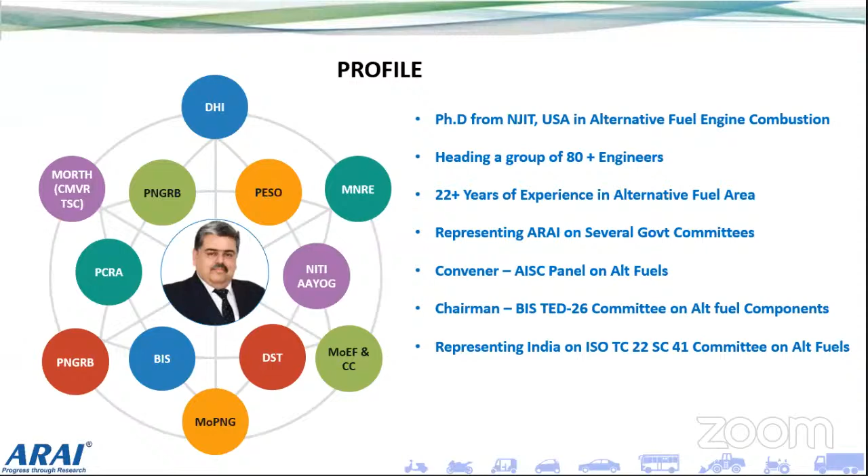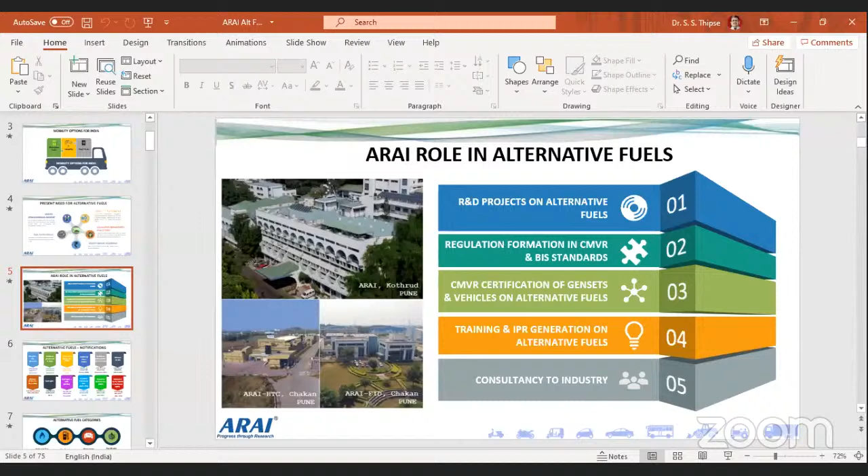Now coming to the ARAI role, as I am a representative of ARAI, we have been working in this area for many years. We do R&D projects, regulation formulation, CMVR certification of gensets and vehicles, and training and consultancy. These are some of the ambits in which we work in alternate fuel. We are based in ARAI Pune, Kothrud, and we also have 2 campuses in Chakan, about 40 kilometers from the main campus.

Now coming to what are the alternate fuels which have been notified in India. There are many fuels notified by the government of India. Normally when a fuel is notified, they issue a number and a gazetted statutory regulation, GSR as we call it, and that establishes the fuel and adds it into the Central Motor Vehicle Rules. So all certification is done as per CMVR, and all fuels are notified in the CMVR. These are the different numbers and names of the fuels which have been notified in CMVR. I will go through them one by one.

Bio-CNG, that is biogas, has been notified as a fuel. Biodiesel, that is B20, 20% blend, and 100% blend. Compressed natural gas, then dimethyl ether, that is a synthetic fuel. Then diesel plus gas - diesel CNG, diesel bio-CNG, diesel LNG. Ethanol - E20, E85, E100, everything is notified. Hydrogen, hydrogen CNG, LPG, LNG that is liquefied natural gas, and methanol - methanol and its derivatives, M15, M100. So these are all the alternative fuels which have been notified by the government for use as automotive fuel.

That doesn't mean all these fuels are present in India, but they are allowed by law. So tomorrow, if any manufacturer wants to introduce these fuels, it is possible for him to introduce them in India.

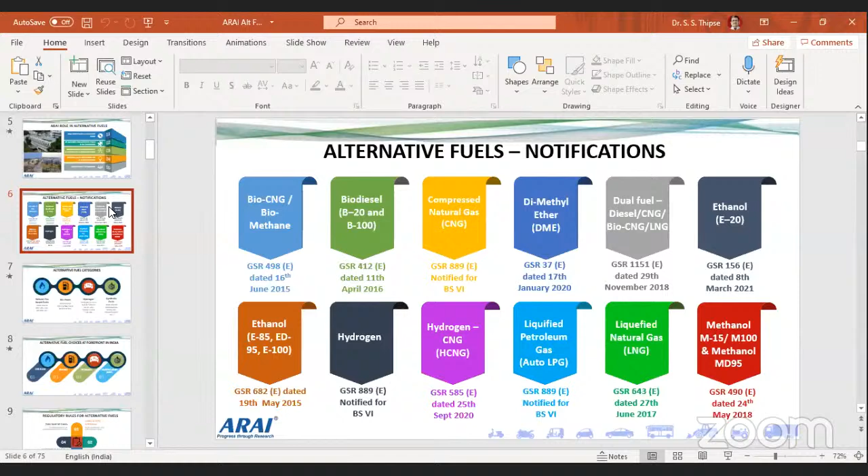Then what are the different categories of alternate fuels? Now I gave you the whole bunch of alternate fuels, but you can classify them into 4 different buckets. The first is naturally occurring gaseous fuels - these are available in nature itself, you don't do any processing for that. Like natural gas - CNG and LNG - all these are naturally occurring fuels, also termed as gaseous fuels. The second is known as biofuel.

Biofuel - the word bio means it is coming out of a living creature, a living organism. So this category of fuels are derived out of living organisms - either a plant or animal is the base of that particular fuel. For example, ethanol, you derive it from sugarcane, so the sugarcane plant is the basis of that. Then bio-CNG is there, methanol is there, ethanol is there. All the alcohols are derived from grains, and grains are again a byproduct of plant. So all these are living organisms, and the fuel is extracted out of it - that's the definition of a biofuel.

All alcohols are biofuels. Then coming to the third category, hydrogen. Hydrogen per se exists in nature, but it is not available per se as hydrogen - it is always available as a compound along with either oxygen as water, ammonia, or hydrocarbon. So there is some carbon, nitrogen, or oxygen attached to it. Hydrogen is a fuel which is always associated with a particular molecule. Hydrogen is one fuel which is important because it is the cleanest fuel, it's a zero carbon fuel. So hydrogen is the third class of fuel.

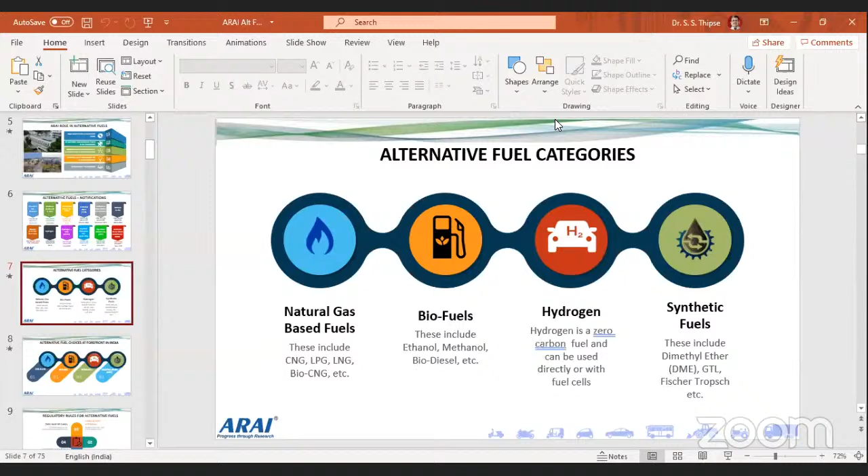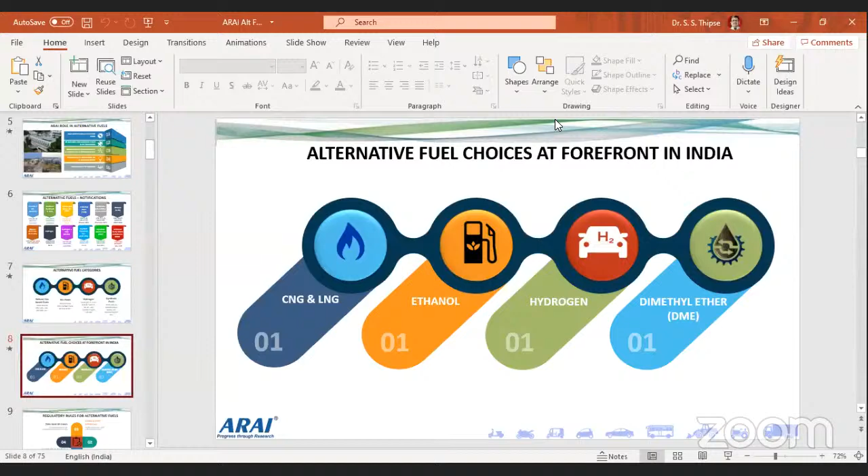And for all four categories, there is a front runner. For the natural gas category, CNG and LNG is the front runner. For biofuels, ethanol is the front runner. For hydrogen, pure hydrogen is the front runner. And for synthetic fuels, DME is the front runner because that is the fuel which is notified in India. Now coming to rules and regulations - there are four types of rules which are important.

One is the vehicle approval rule - that is, how do you approve a vehicle for use in India. So there the CMVR rules 1989 are applicable, and ARAI does the vehicle approval.

Then you have fuel sale by OMCs. This is governed by the petroleum rules, when all your petrol, diesel, gas, everything is sold as per the Ministry of Petroleum rules. Then comes the station, the dispenser, meaning the entire gas station, the tanks, the storage - that is governed by PESO, the Explosives Department.

And then comes the cylinder and the valve, which is fitted on the vehicle. That is governed as per the gas cylinder rules - a different authority. So these are the four different authorities which govern the regulatory scenario for alternate fuels.

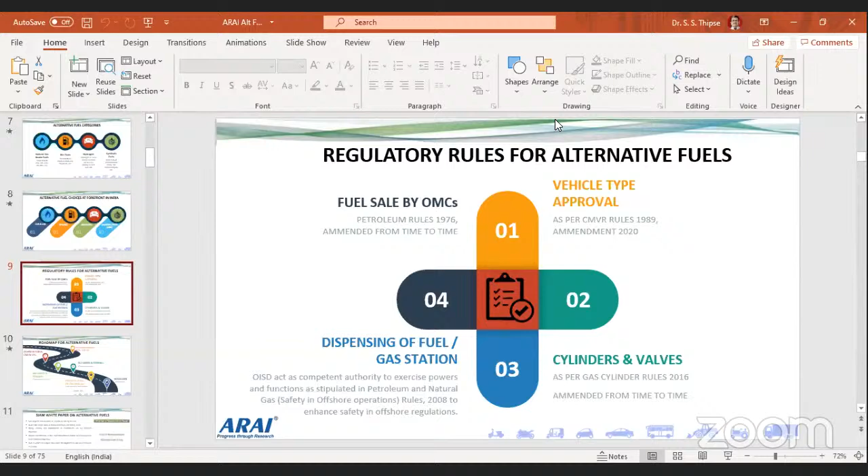Now, how is the roadmap for alternative fuels going on? In this case, first of all, we started with petrol and diesel - the conventional fuels, that is high-speed diesel and motor spirit, that is gasoline.

Then we shifted to gaseous fuels, including CNG and LPG. After that, we slowly started introducing biofuels - biodiesel and ethanol came into the picture. Now we are in the second generation biofuel, derived from cellulose and other feedstocks. So this is the stage where we are.

In the future, we will move to synthetic fuels. The first synthetic fuel has already entered the country, and slowly more will come. Lastly, hydrogen will be the ultimate goal for any fuel because it has no carbon. So the entire roadmap leads to hydrogen in the end.

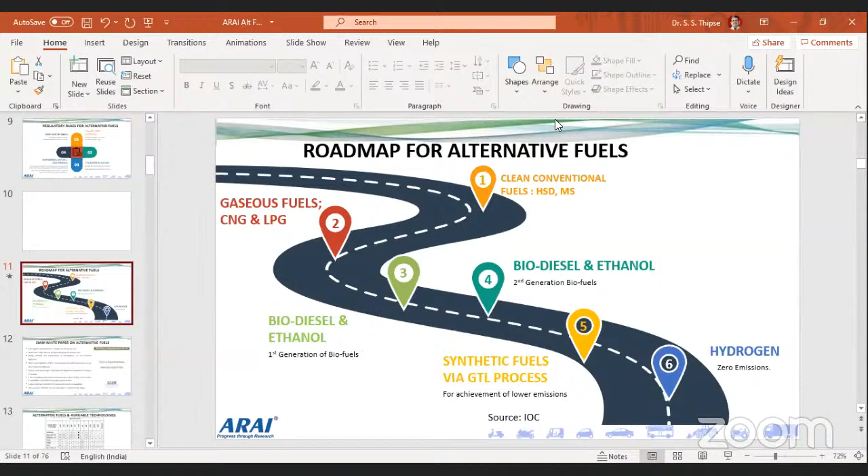This is available on the internet. If anybody is interested, they can see this roadmap, which is widely available. It is a very good document which gives a guideline on what fuel to use for which segment.

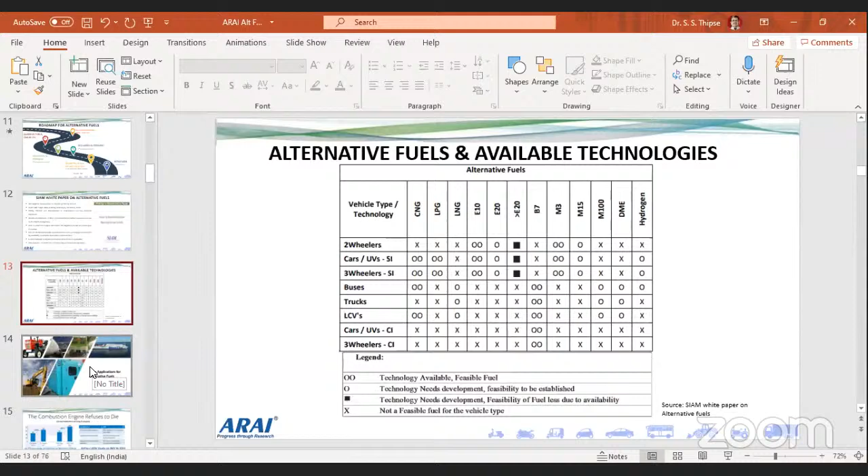Then another big debate going on in the world - if electric vehicles are coming, will the IC engine survive? So whether there is a requirement of engine and fuels. I am quoting a study here from Arthur Little, available on the internet. What Arthur Little has done is compared electric vehicle with the IC engine vehicle, making three areas of comparison.

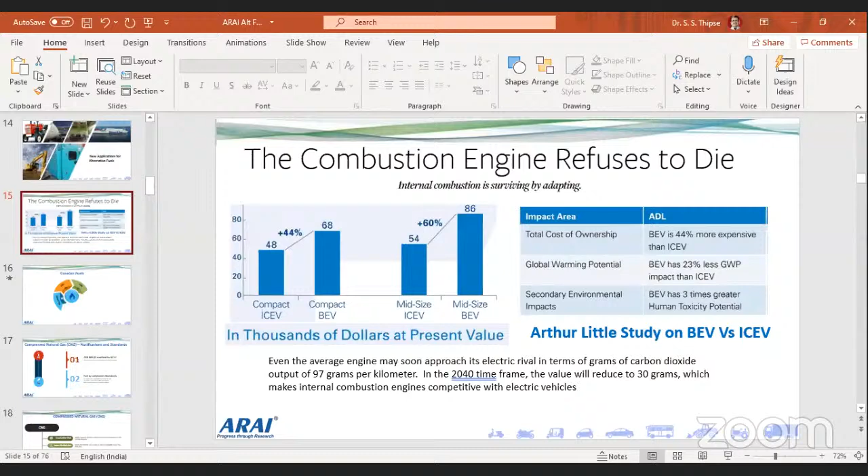We should realize that as electric vehicles are growing, IC engines are also adapting. It is not the end of the road. Our thermal efficiency is hardly 44% for IC engines, so there is still a lot of growth potential and ample research required. IC engines are not going to die; they are going to survive by adapting. So don't despair that because all-electric is coming, engine and fuel have no future - nothing like that is going to happen. That is the message we are giving.

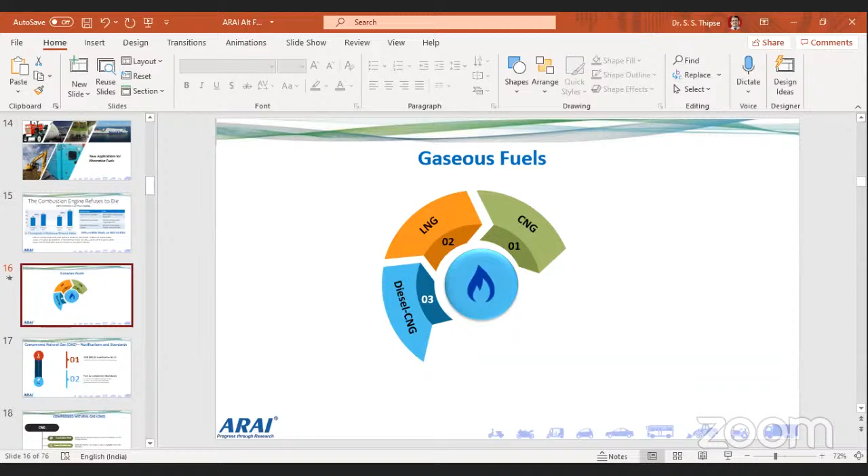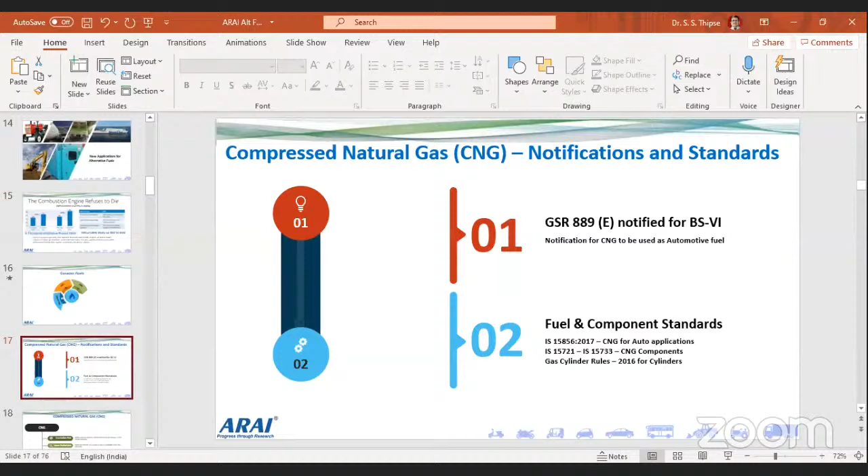Coming to the different segments, I will first focus on gaseous fuels, starting with compressed natural gas. This was notified in India way back in 1991, and even for BS6 it is notified. These are the standards for the different components, the Indian standards which are readily available.

What is the advantage of CNG? Basically it's a low carbon fuel, widely available, lower particulate, renewable, and extremely cost effective. CNG is hardly 40 to 50 rupees per kg, whereas petrol and diesel are now 100 rupees - almost half the price. It's definitely something which is growing in India.

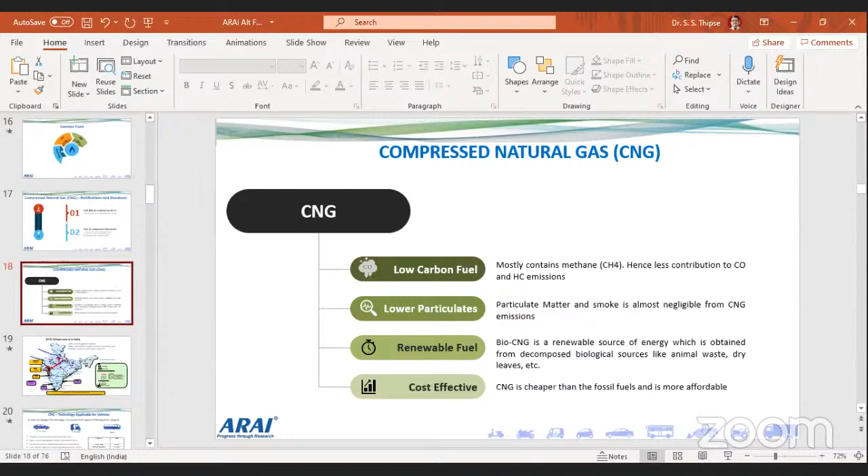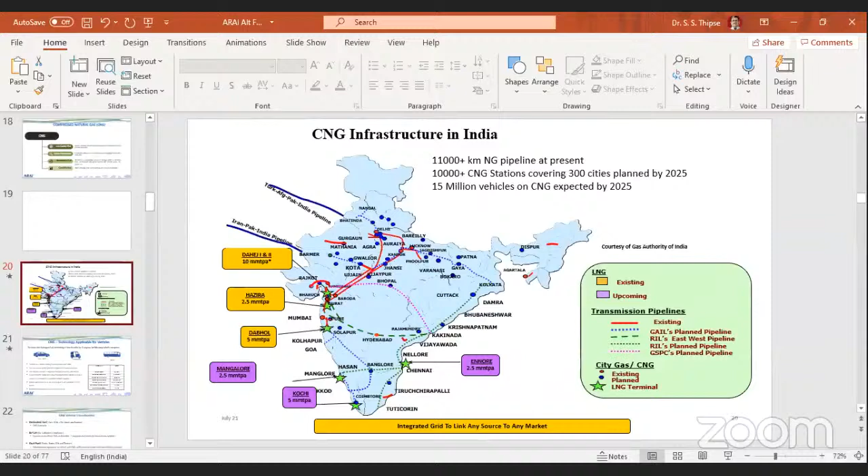There is a lot of pipeline infrastructure being laid in India - almost 11,000 kilometers of natural gas pipeline right now, and around 10,000 plus CNG stations are planned. 15 million vehicles are expected by 2025, so it's a big growth story for CNG in India. Many pipelines are already in place, and many more are planned, so even the east and southern parts of the country will be covered with gas pipelines.

Now if you see the applicability of CNG for vehicles, right now CNG is most useful for cars, three-wheelers, and buses. This is being used for these three categories, and on the right side you are seeing the properties of CNG.

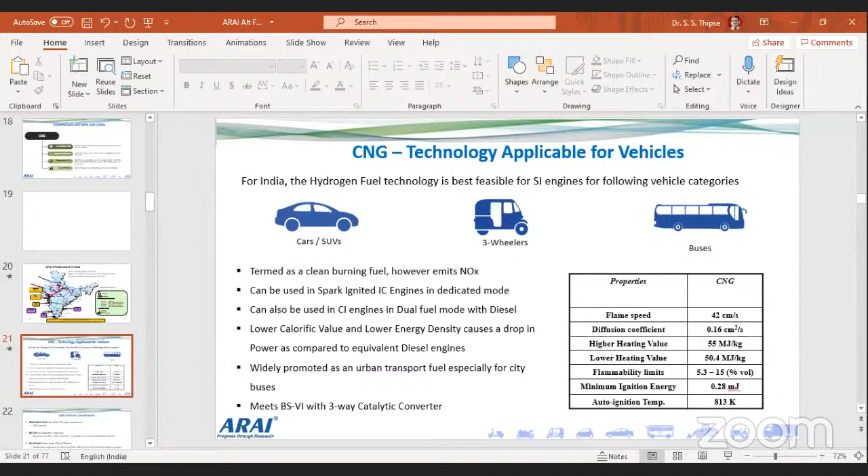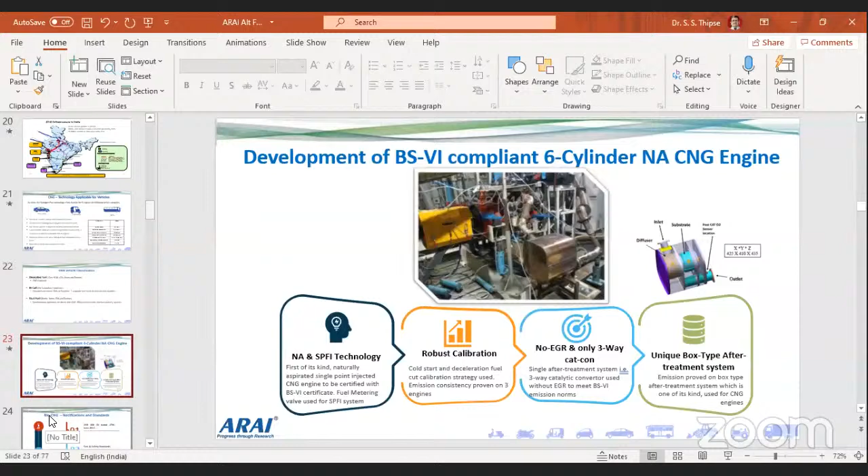Now coming to the next fuel, bio-CNG. This is the rural aspect of CNG, where you take waste and refine it to form bio-CNG. So bio-CNG is one fuel which is a derivative of biogas - all of us are aware that when waste decomposes, it forms biogas.

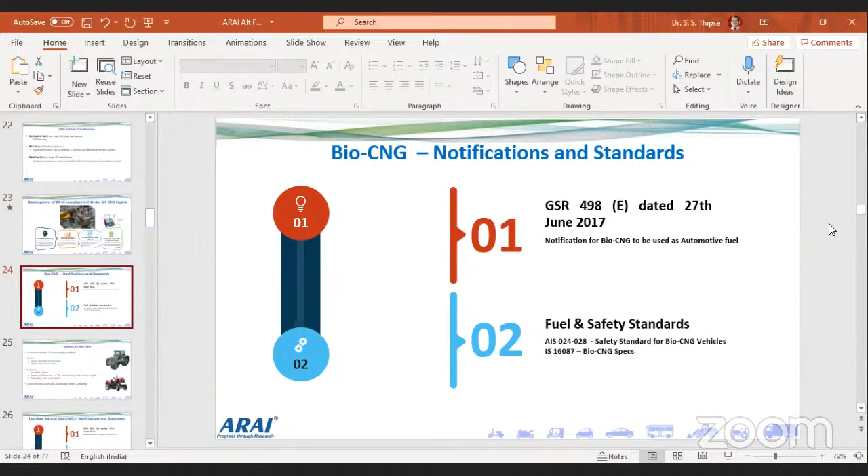And if you purify the biogas, it becomes bio-CNG. So these are the standards for that, and a lot of applications on bio-CNG are being developed, including tractors.

The only issue with bio-CNG is that you need to clean the biogas. You cannot directly use biogas as it is. You have to remove the carbon dioxide, the hydrogen sulfide, and the moisture. Once you do that, the biogas becomes bio-CNG, also called CBG, compressed biogas. That compressed biogas is equivalent to CNG because it is similar in characteristics, and with that you can have different applications.

Typically, this is a rural fuel because the majority of agricultural waste is used for bio-CNG. Typically, people burn that waste, and that causes air pollution, as is the case in Delhi every time. Smog is created because farmers from Punjab burn the waste. So instead of burning that waste, if we can convert it to biofuels, that will be a very good source of energy.

That is bio-CNG, and it can be used for rural applications like tractors, generator sets, rural electrification, and pump sets. All these things can run on bio-CNG. Fuel can be produced there itself and used there itself. So it's a rural fuel, one of the very good fuels, and permitted by the Government of India.

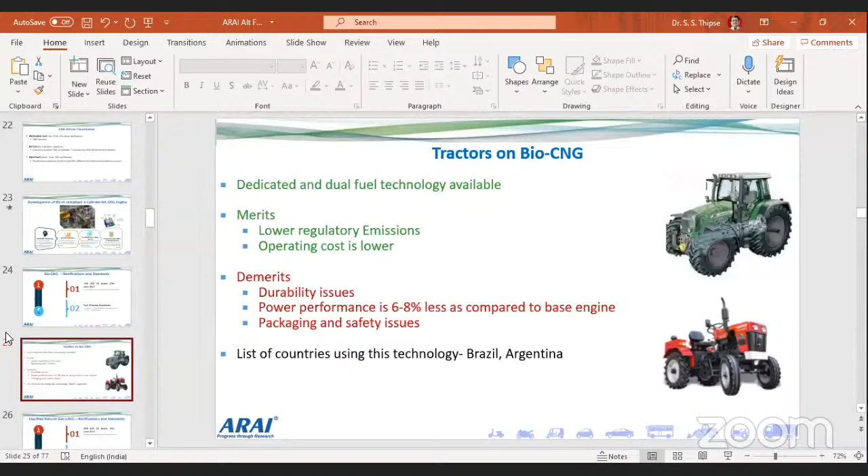Next is LNG. This is another form of natural gas, wherein CNG is compressed natural gas in the sense it is a gasified form. But if you use very low temperatures, like cryogenic temperatures, you can go to LNG, which is liquefied natural gas. The gas becomes a liquid at -162 degrees.

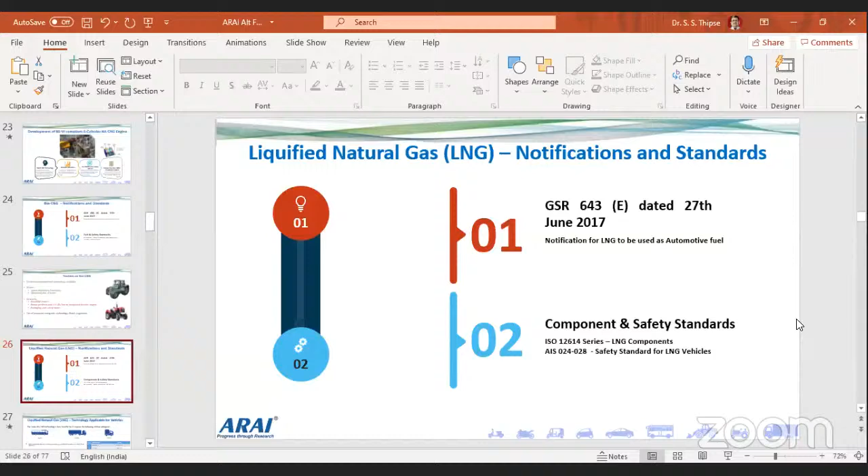This liquid gas - what is the advantage of making it a liquid? You can store it in the vehicle for a greater range, so you can increase the range of the vehicle by having this storage. You can use this for buses, trucks, LCVs, all these different applications can use LNG. It is a very compact storage, just like petrol and diesel, a very compact tank, but it is a cryogenic tank, so it is slightly expensive.

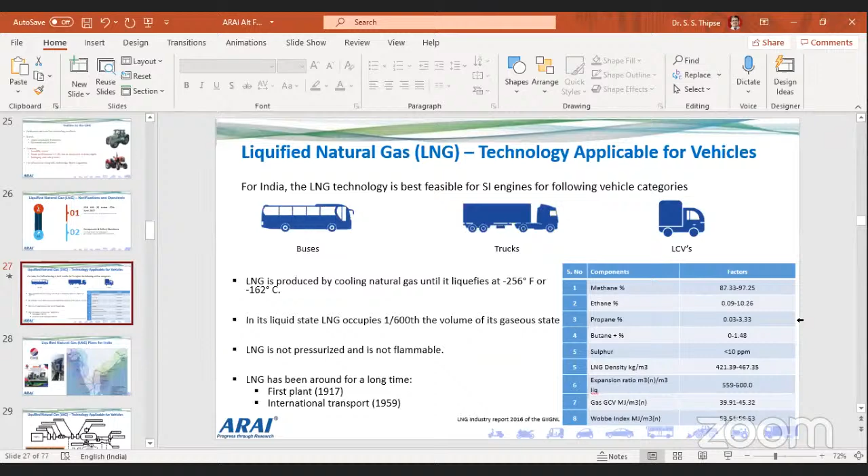LNG is being looked upon as one of the fuels for highways, because in the cities you have CNG, in the rural parts you have bio-CNG, but along the highways where you have long distance trucks and buses running, LNG is the best fuel for that application.

And with this, all the different cities adjoining these ports will get LNG fuel. We can also gasify LNG, and once you gasify LNG, you can then make CNG out of it. So that is very much possible.

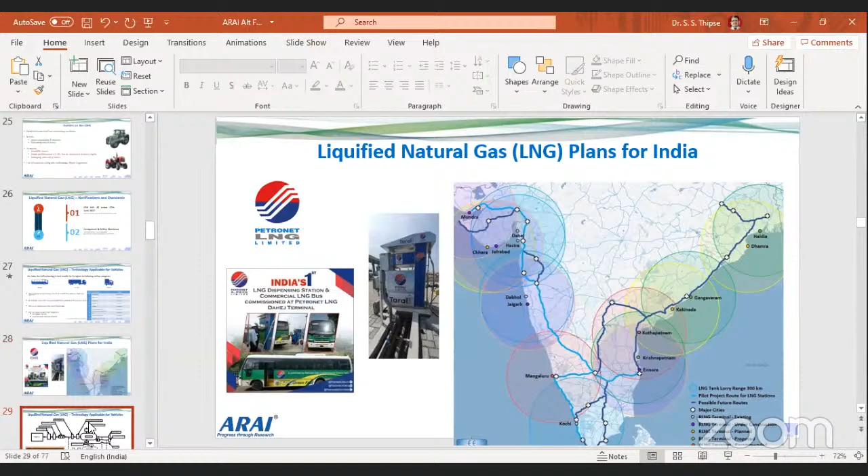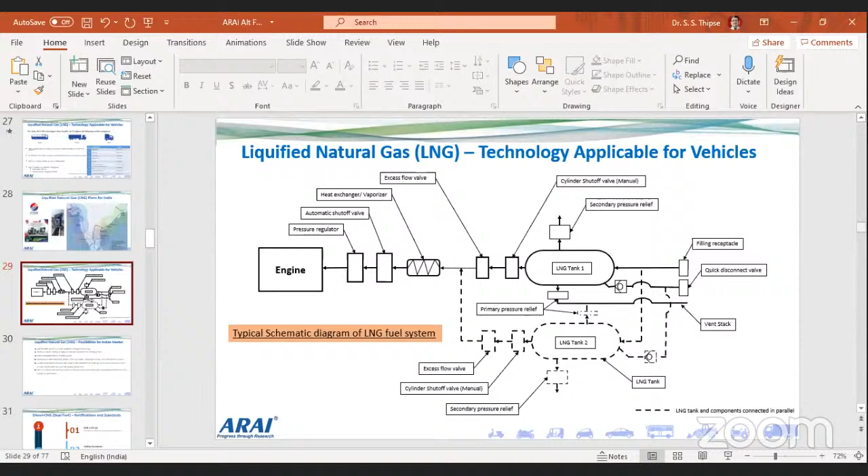This is how a typical LNG system is on the vehicle. The LNG tank has to be fitted on the vehicle. There are many safety gadgets, including a pressure regulator and excess flow valve, and you have to put that system onto the vehicle, adapt it, and take care of the safety and other aspects.

There are many possibilities because LNG, as I said, is promoted as a highway fuel. Trucks and buses are the ideal candidates, and definitely many more stations are coming up. There is also talk of an LNG corridor, where certain sections of the highways will have LNG stations. A lot of activity is happening in this respect. One vehicle is already certified on LNG in Kochi, Kerala, and is already running, so many such vehicles are expected.

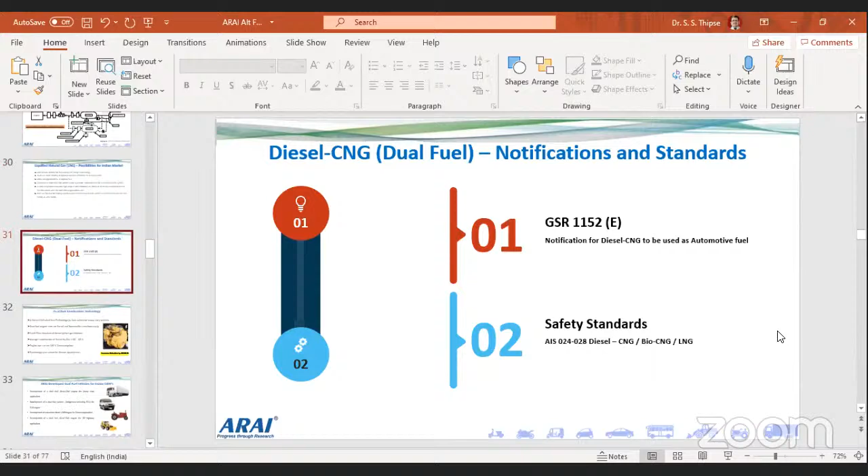Then there is diesel gas, or diesel CNG dual fuel, another technology I talked about earlier. This is another technology of interest. What is this dual fuel technology? Typically in a gas application, you need a spark ignition engine.

But suppose you have a compression ignition engine and want to use natural gas in it. If I directly use natural gas in a compression ignition engine, it will knock - there will be a knocking phenomenon. How do I solve this problem? Suppose I use diesel plus gas together. In the ordinary diesel engine, air comes inside, gets compressed, diesel is injected, and the whole mixture is ignited.

In this case, you have diesel plus gas together coming inside, and it gets ignited. Air comes in, natural gas comes along with the air, but the heat of compression does not ignite the natural gas and air. When the diesel is injected, it ignites the natural gas and air. So the total mixture is ignited by diesel, and you can run this on diesel plus gas together.

The advantage is you don't have to make changes in the engine, no need for conversion of CI to SI. You can substitute diesel by gas up to roughly 85%, but you cannot run on 100% CNG. You can run on 100% diesel, but not 100% CNG. So there should be partial replacement, and the engine remains a diesel engine.

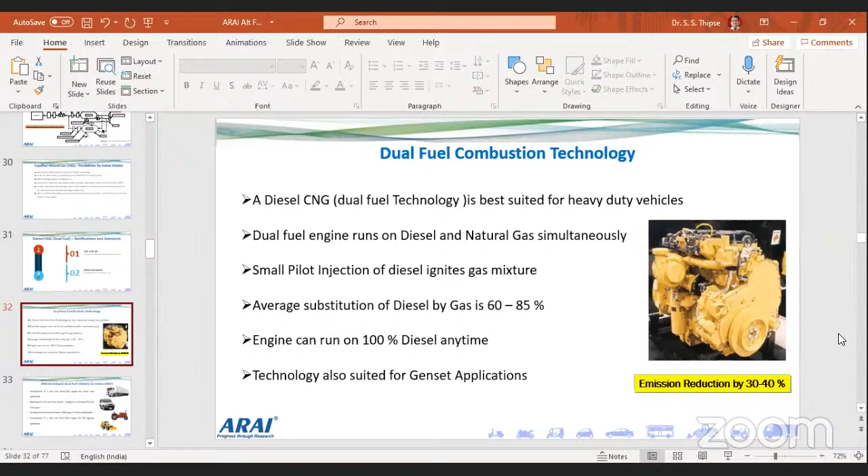What is the advantage of adding CNG in diesel? Pollution comes down, emissions come down. You also get an operational cost benefit because, as mentioned, gas is cheaper than diesel. So you get less pollution and operational cost benefit, while not changing the engine operating characteristics. These are the advantages of dual fuel technology.

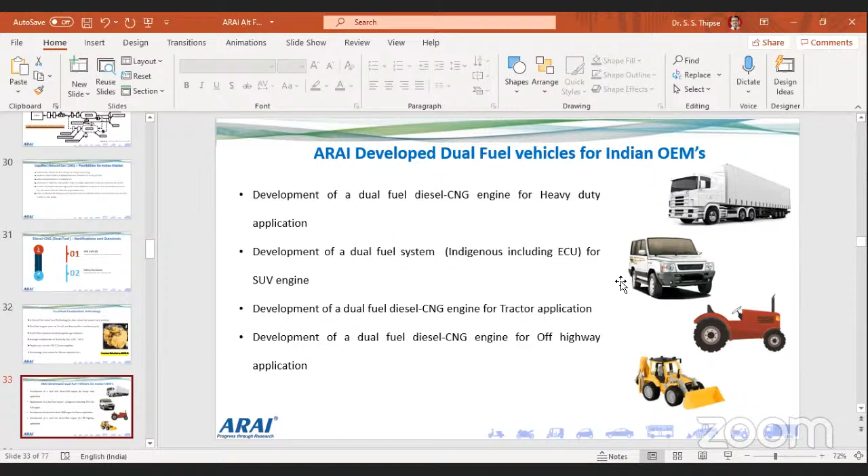ARAI developed a lot of applications for dual fuel: heavy duty, SUVs, tractors, off-highway — all these projects we have done in the past for dual fuel. Also, in terms of rules and regulations, ARAI played a major role.

Now, this is one very unique application: a construction equipment vehicle on dual fuel. Construction equipment vehicles are typically all diesel-based — forklifts, excavators, earth movers, and all kinds of dumpers. All this earth moving equipment are ideal candidates for dual fuel because you can use some gas in them, which helps reduce diesel consumption and save money. Countries like Thailand, New Zealand, and Australia are already using this technology, but in India too it is permitted, and the first vehicle of its kind has already been launched by JCB.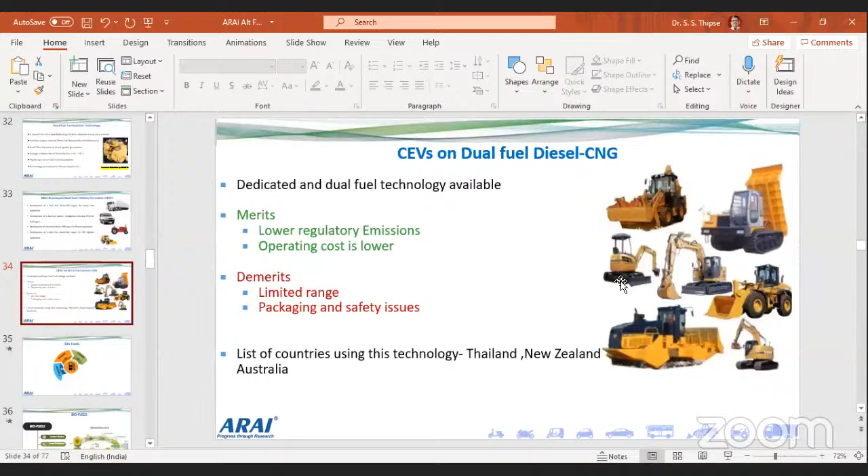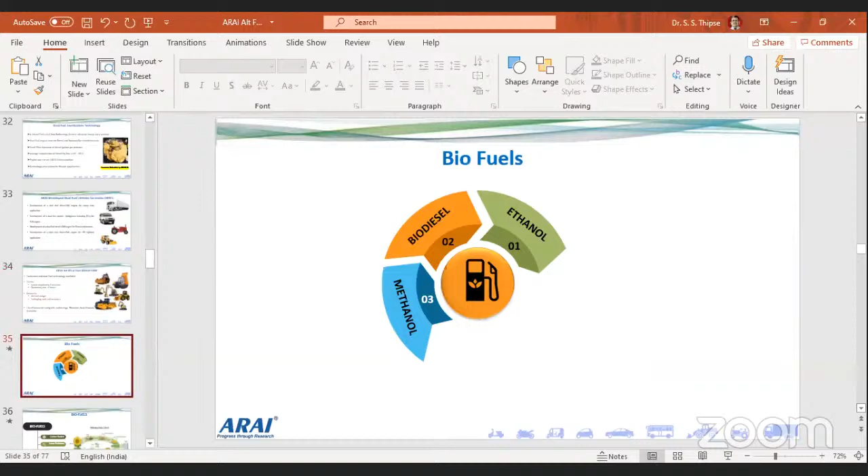Then coming to biofuels — the next area of interest. Here we will talk more about biodiesel, ethanol, methanol, and different biofuels. The main thing here is the biofuel cycle.

Biofuels are called carbon neutral. Why? Biofuels are very important when we talk about reducing CO2 and meeting the Paris Climate Agreement. Any plant, when growing — any oil crop or similar — absorbs carbon dioxide from the atmosphere for growth through photosynthesis, and then produces seeds. Those seeds are taken and the oil is extracted, and from the oil, the fuel is extracted.

This fuel has to be used inside the vehicle. If the fuel is burned in the vehicle, it will again produce CO2. But remember, when the plant was growing, it had already absorbed CO2 from the atmosphere. So it is simply giving back the CO2 to the environment — it is not adding to the CO2 tally. That's why it's called carbon neutral: it absorbs CO2, it produces CO2. Whereas fossil fuels directly add CO2 into the atmosphere, so they are not carbon neutral, but biofuels are.

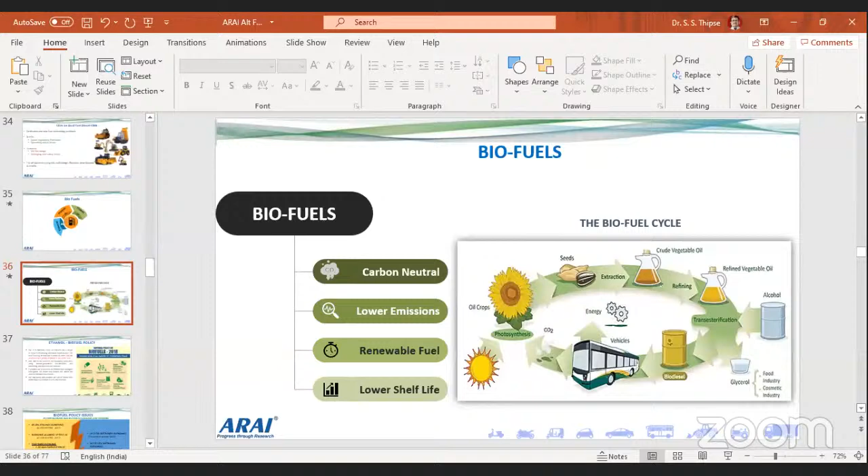Hence their role is very important in promoting low carbon fuels — these are very important aspects. They are also renewable, though they have some shelf life issues. So biofuels are being looked upon in India in a major way.

Then we have the biofuel policy, released in 2018, which discussed ethanol blending with gasoline. Initially the target was 5%, then 10%, now they are talking about 20%, and they even preponed the target from 2030 to 2025 — this is a very recent addition. Ethanol blending is now promoted in India, and they are generating ethanol not only from sugarcane but also from damaged food grains and from corn. All these are allowed, and with this there will be additional generation of ethanol in India.

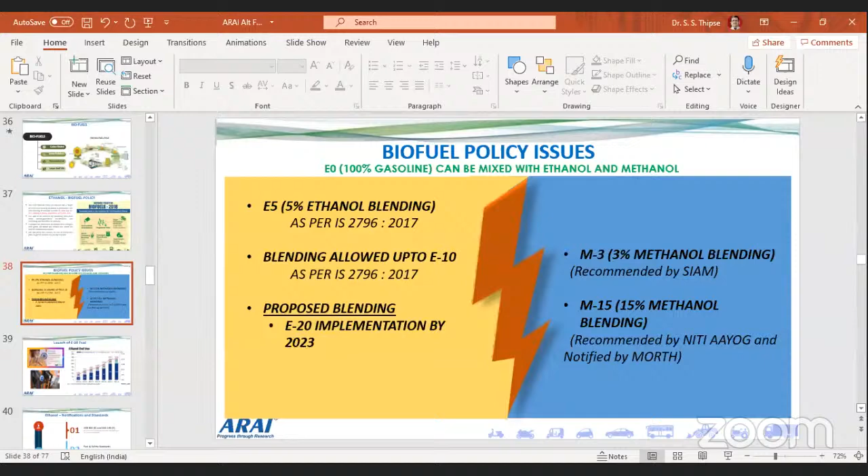There is also a parallel talk about methanol. People are talking about M15 methanol blending as recommended by Niti Aayog, while SIAM is recommending M3. At present, E20 is being recommended as the ethanol fuel standard. Recently, the PM launched the Ethanol 20 program on World Environment Day, and that lays out the roadmap going forward. Today, in 2021, we are at 8.5% blending.

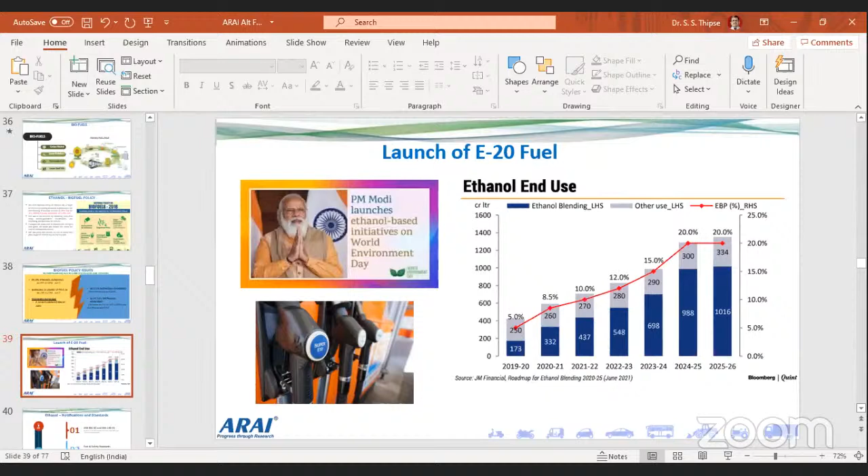So by 2022, 10% blending is predicted. Then after this, by 2025, we are predicting almost 20% blending of ethanol. That is the plan, so we have to see how we are going to stick to it. But one thing is clear, the ethanol production is going to increase day by day.

Coming to notification and standards, ethanol is already notified as automotive fuel. All the different standards are already in place. 20% ethanol is allowed, 85% is allowed, 95% is allowed, and even E100 is allowed. All the standards, rules, and regulations are already in place.

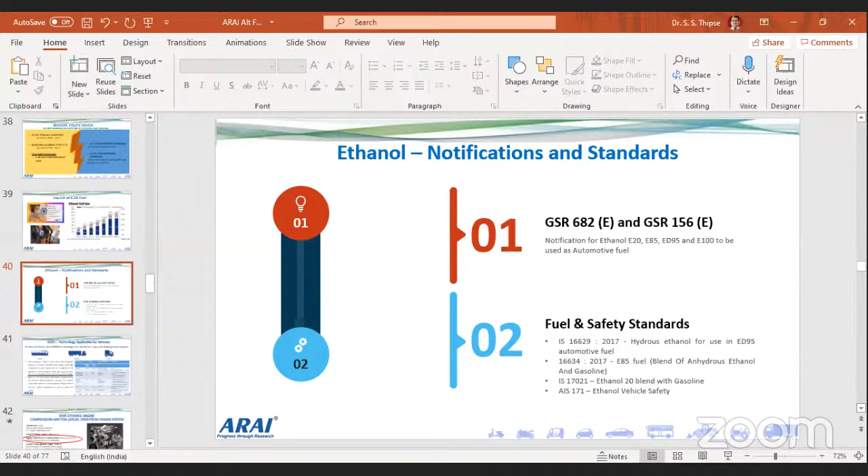There are different technologies for ethanol, which I will talk about now. The first is a very interesting technology, compression ignition of ethanol, ED95. This technology is for buses, trucks, and LCVs. Normal ethanol you can blend with gasoline and use in two-wheelers, three-wheelers, four-wheelers—everybody knows that. But this is a very unique technology: with additives, 5% additives and 95% ethanol, you can run even a diesel engine with a very high compression ratio.

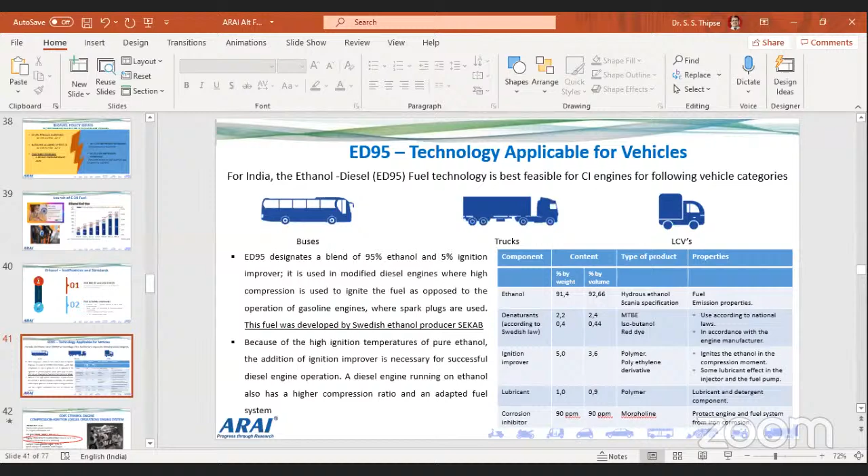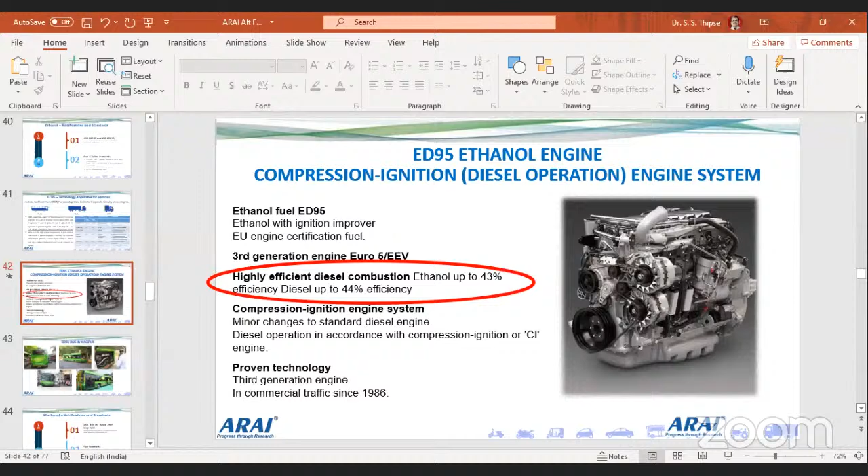This kind of technology has been brought in by Scania, where you get an engine with thermal efficiency equivalent to diesel using ethanol. So it's practically a pure ethanol engine. There are buses running here in India in areas like Nagpur, where ethanol buses are already running. These vehicles are already running on ethanol, and they are very popular in Nagpur, with more buses to be introduced in the long run.

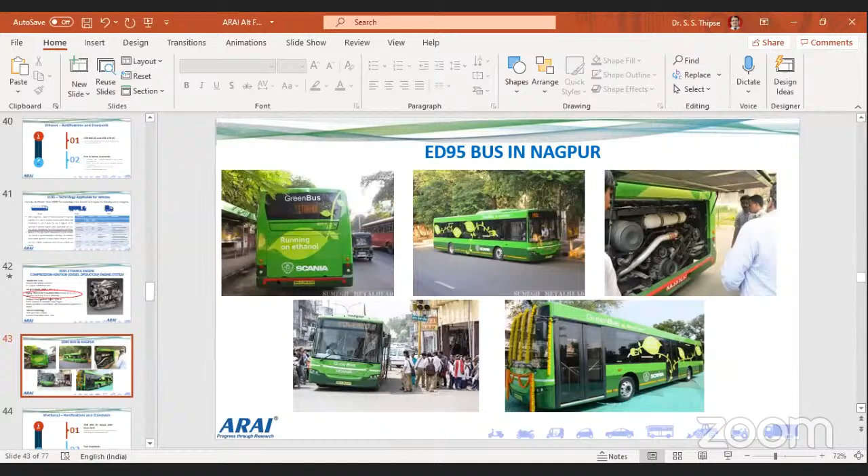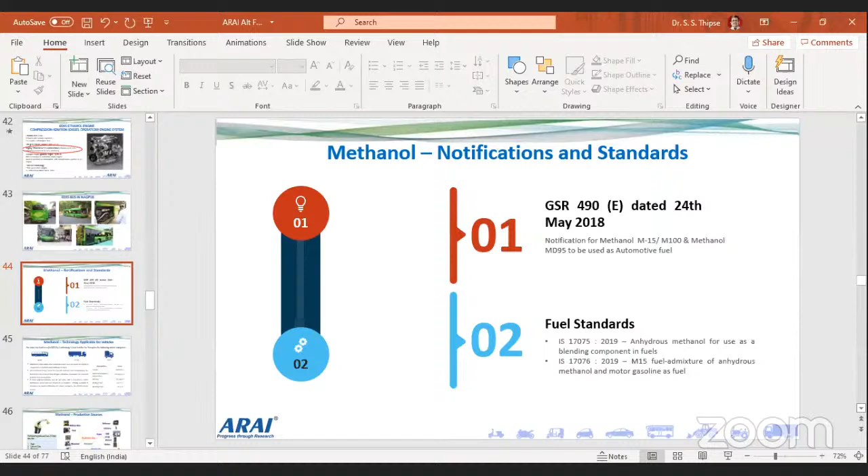Another fuel which I mentioned to you, apart from ethanol, is methanol. This is another fuel being promoted in India. Why is methanol being promoted? It is basically a fuel produced either from natural gas or from coal. Coal is one of the major sources of methanol, and high ash coal is amply available in India. High ash coal is not suitable for power generation.

So this is the plan of Niti Aayog: you have waste biomass, you have high ash coal which is not suitable for any other application, so why not use it to convert to methanol and then use it as a vehicular fuel? The only issue with methanol is that it is toxic, so there are some concerns regarding its use. But if you follow all the safety procedures, there should not be any issue as far as methanol use is concerned.

So Niti Aayog is talking about a methanol economy. What is a methanol economy? It means you take different sources like coal, biomass, or even capturing atmospheric carbon dioxide, and then convert it into syngas. Syngas is CO plus H2, and then you can generate it into methanol.

Now methanol itself is a very valuable chemical. From methanol, you can use it as a fuel, or you can use it as a chemical also. You can generate many other chemicals like olefin, formaldehyde, acetic acid from methanol, and also many other fuels can be generated from methanol. You can use methanol directly as a fuel, you can go to gasoline, you can use DME—dehydration of methanol—then you have MTBE, methyl tertiary butyl ether, then you have ethanol also. Many other fuels can be generated from methanol, so methanol becomes a valuable feedstock, and that becomes one of the basis contentions of the methanol economy.

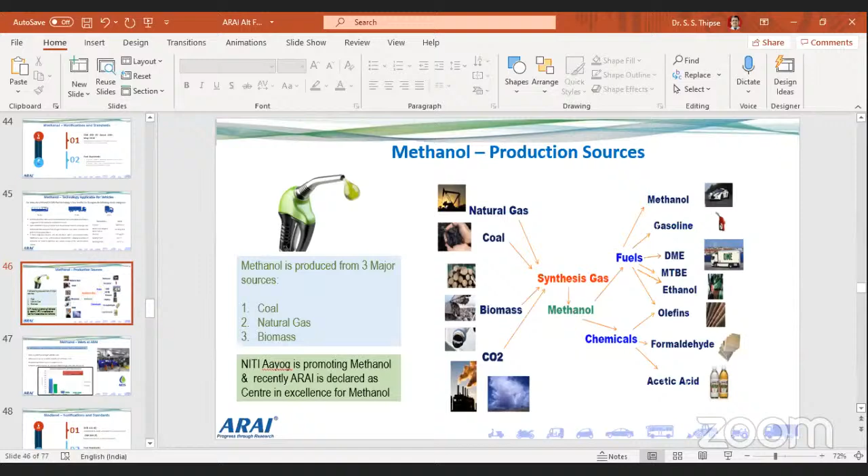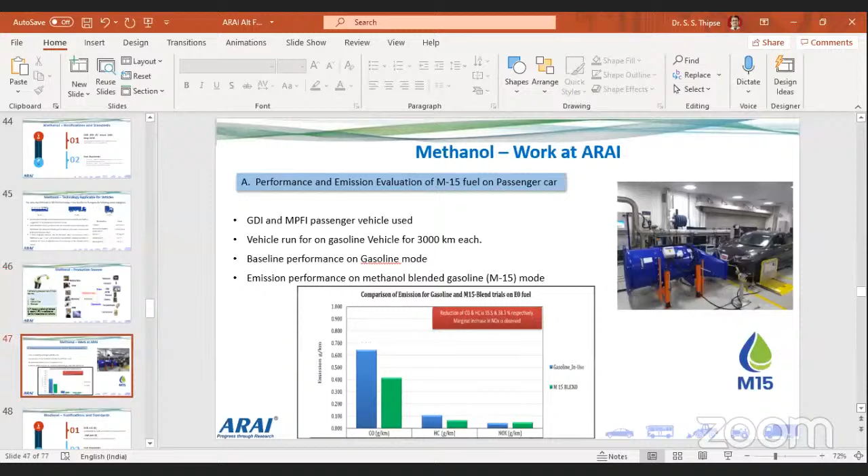Now, in ARAI, we did work on methanol blending with gasoline, 15%. Our work was submitted to Niti Aayog. We ran vehicles on M15 blend, and all the data was shared with the government.

Coming to the next biofuel, that is biodiesel. Now, biodiesel is an esterified vegetable oil, so it is a fuel made out of vegetable oil. There are many standards and notifications already in place for this fuel as well. This is one of the fuels which was earlier, in the last 20 years, talked about a lot for areas where there was less income as far as agriculture was concerned.

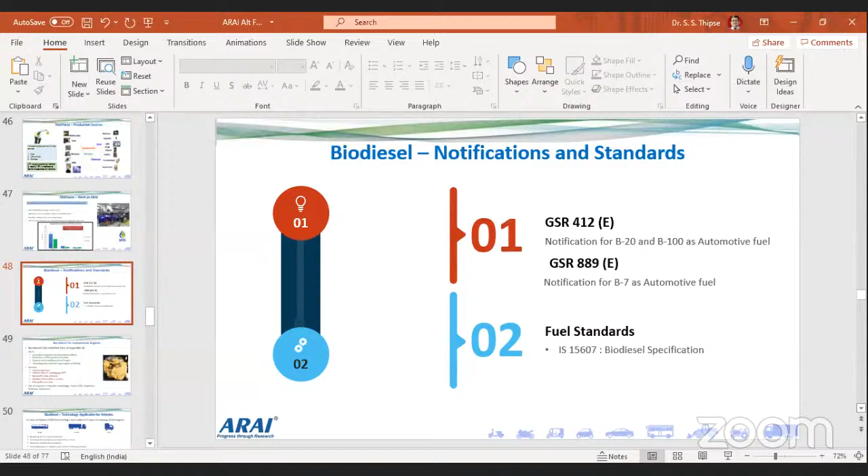So oil seeds are available a lot in India. The oil had to be extracted, and then the biodiesel had to be prepared and used in different vehicles. Biodiesel is esterified from vegetable oil, and is used where vegetable oil is abundant. With that you can generate a fuel which can be used in an engine requiring lesser modification, and it is best suited for larger engines. The advantage of this biofuel is that it will reduce CO, HC, and PM emissions.

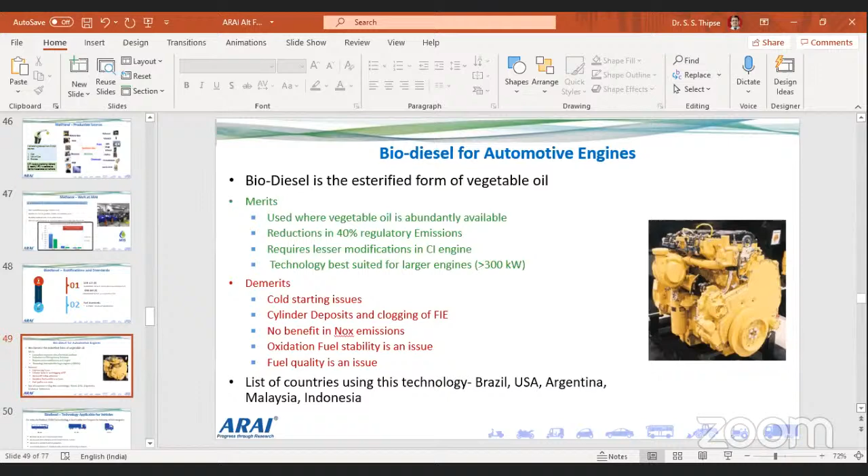There are certain demerits also, but many other countries have been using this fuel, like Brazil, USA, Argentina, and they have kind of solved all of these issues. So in India also, B100, we already worked on this, and many applications on B100 are there. Unfortunately, the fuel itself is not available to a greater extent, so we are not able to use it.

Biodiesel is an ideal fuel for buses, trucks, and commercial vehicles. It can be directly used as B100 or blended with diesel as B20. It has excellent lubrication properties, but as I mentioned, availability is poor, and hence the blending is very less. These are the issues with biodiesel technology, but people are working on it, and many other rural applications on biodiesel like tractors and all are being developed.

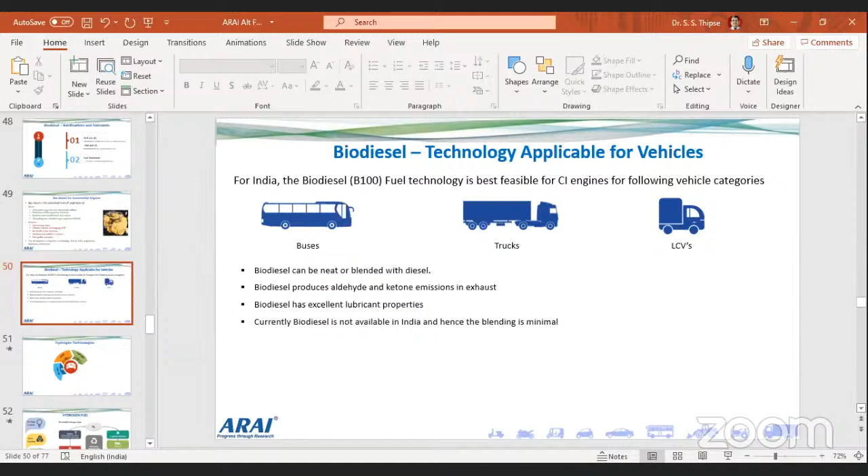Now coming to the third basket of technologies, which is hydrogen. If you say hydrogen technology, there are three aspects to it: use as pure hydrogen, or use as a blend with CNG, hydrogen-CNG, or use in a fuel cell vehicle. So all these three aspects are the branches of hydrogen.

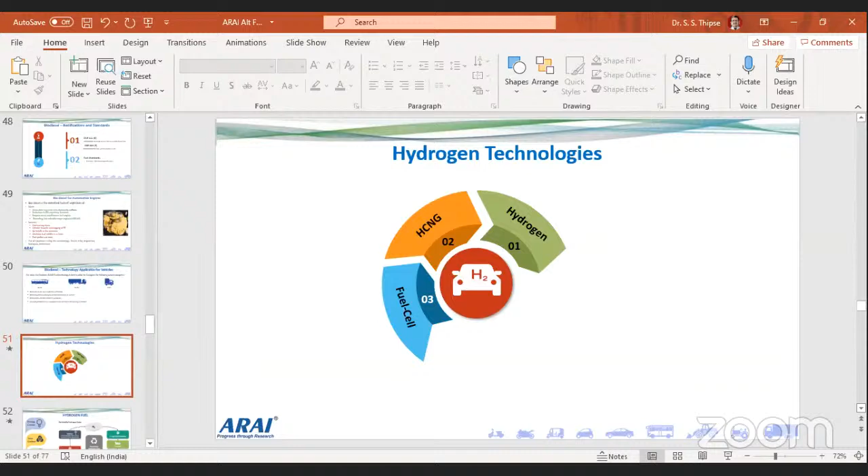So if we go to the next slide, we are talking about hydrogen fuel as a renewable fuel. Now, hydrogen is also a renewable fuel. Why do we call it a renewable fuel? First of all, it is zero carbon. And when you generate hydrogen, you use it in a particular application. Let us say you use it in an engine or a fuel cell. Hydrogen is converted to water.

And that water, when you split it with the help of electricity using the electrolysis method, you recover hydrogen back. So it's a cycle: hydrogen you burn to get H2O, H2O you split to get back H2. So this is a cycle for hydrogen which is there. And with this, you can imagine that this fuel has a perpetual life. There is no end of life for this fuel, because it is perpetually existing in nature and it can be generated very efficiently. So those are the advantages of this particular hydrogen.

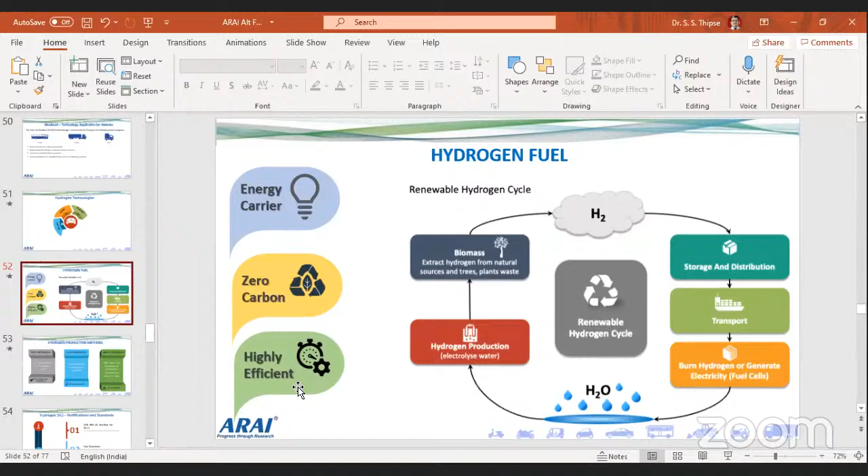So it is called one of the future fuels, or people say that all roads lead to hydrogen in the future. There are three types of hydrogen - a classification which has now been given: gray hydrogen, blue hydrogen, and green hydrogen. So when I use renewable energy, whether it's water-based, wind-based, or solar, and I split water into hydrogen by electrolysis with no carbon emission, then it is called green hydrogen.

Suppose I split natural gas to generate hydrogen and I ensure that the CO2 is not released - I capture the carbon, but I split natural gas - then it is called blue hydrogen. And if I split natural gas and release carbon dioxide into the atmosphere, it is called gray hydrogen. So in India, we are focusing on blue hydrogen and green hydrogen, which is of greater importance for us.

Now, hydrogen applications - you can use it in different applications. The rules and regulations for hydrogen are in place, and applications of hydrogen include cars, three-wheelers, buses. Different applications are there. These are the properties of hydrogen.

It is one of the best fuels. It's a clean burning fuel. As I mentioned, only water is produced and hardly any emissions because there's no carbon at all. So no question of CO, HC, CO2 - nothing is there. It's a very clean fuel. Only issue is the safety aspects, which has to be taken care of because the safety hazards are very important.

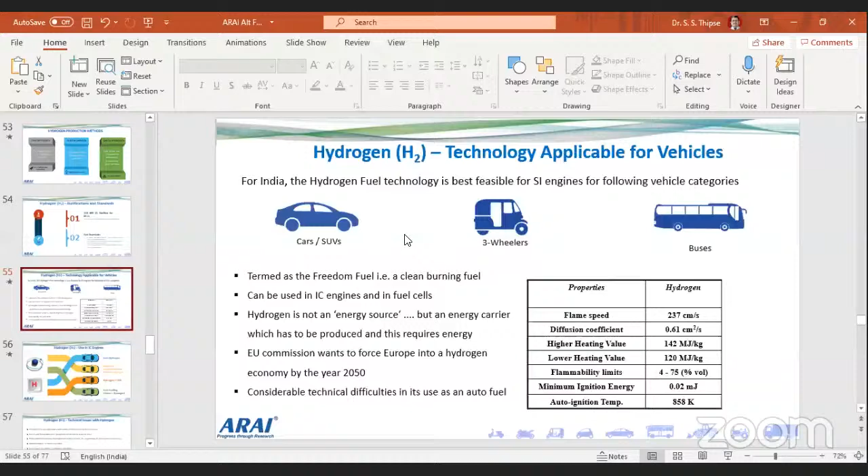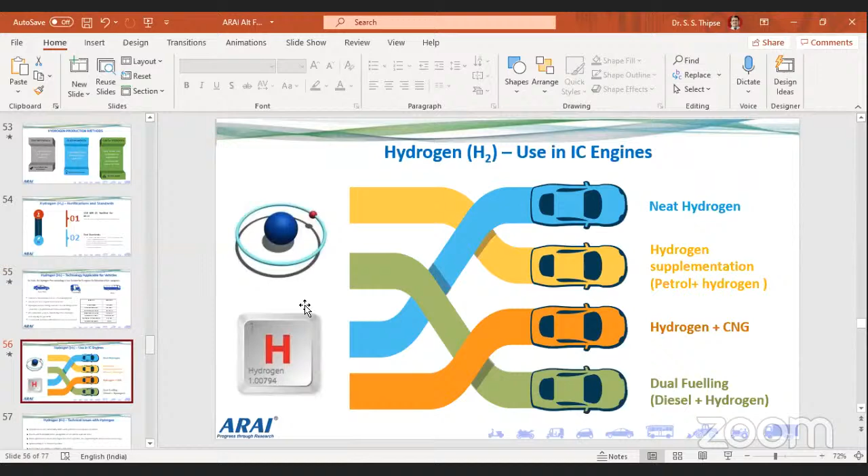Now, in terms of use in IC engines, you can use it as neat hydrogen, 100% hydrogen. You can use it as a supplementation with petrol. You can use it as hydrogen plus CNG. You can use it as dual fuel. Everything is possible as far as hydrogen use is concerned.

As I mentioned, there are some serious safety issues with hydrogen. We know hydrogen is a very good fuel, but why are we not using it now? Because a lot of research is required to really solve all these technical difficulties, including the wide flammability limit, pre-ignition issue, very high flame speed, and very low ignition energy. It is also difficult to detect a leak because it is colorless and odorless.

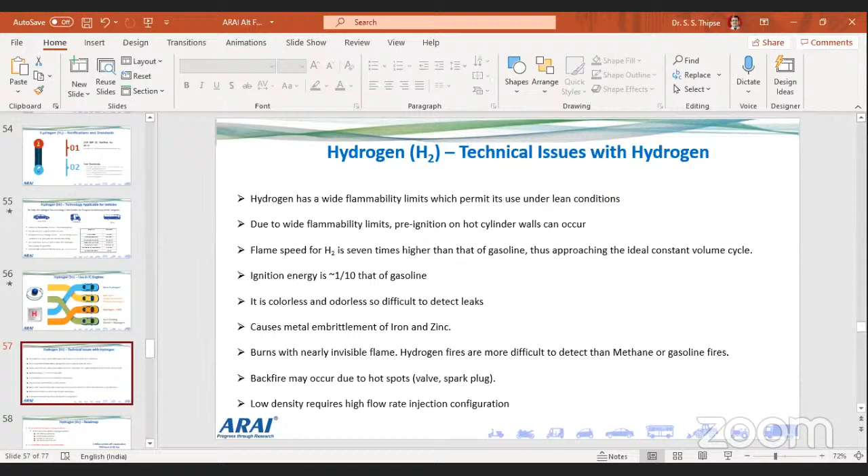It causes metal embrittlement. Many issues are occurring with hydrogen, and there are also safety issues like backfire and misfire. Backfire means the flame traveling backward instead of going forward. The flame should go from engine to exhaust, but if it goes from engine to intake, imagine what kind of problems will occur. So those kinds of things should not happen. These are some of the technical issues which require a lot of research, so the government is promoting hydrogen in a very big way.

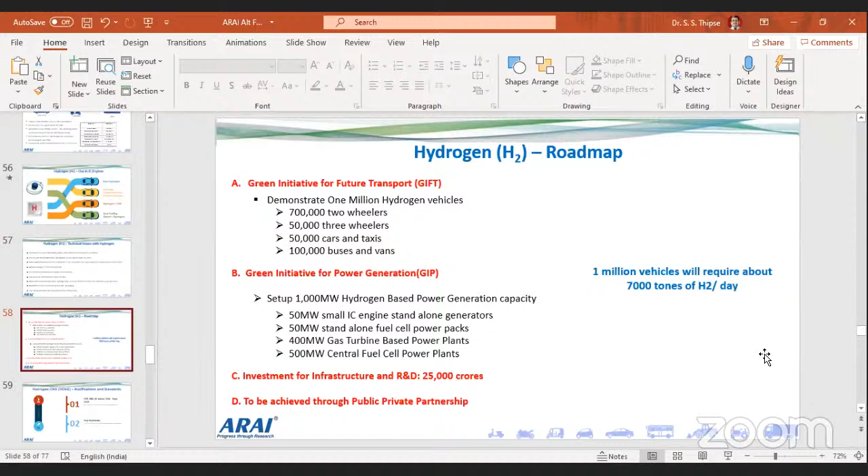Recently, they unveiled a roadmap for demonstrating hydrogen vehicles also for power generation, and a lot of investment is going in. The Ministry of New and Renewable Energy has released the hydrogen roadmap in the interim, and a lot of activities are going on. Another fuel of interest is hydrogen CNG.

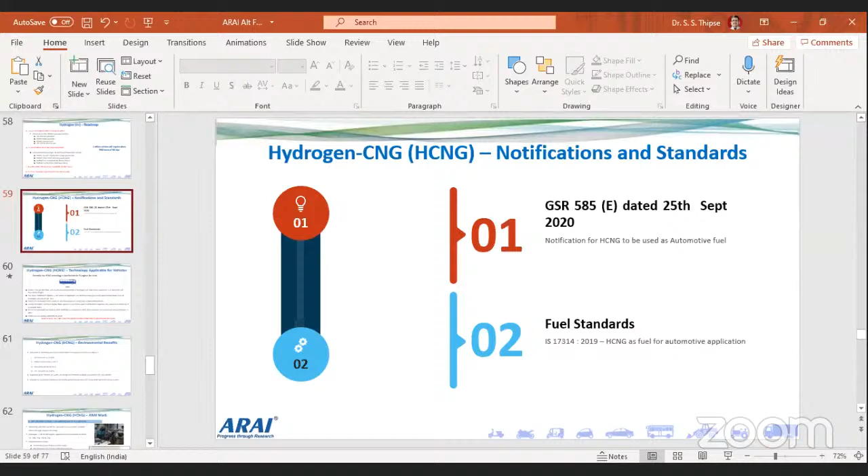Hydrogen CNG is a blend of hydrogen and CNG. This is also allowed in India as an automotive fuel. What is the advantage? You get to use hydrogen and CNG together.

This hydrogen CNG has a unique advantage in that it can reduce even NOx emissions. The drawback of CNG is that NOx emissions are not reduced, but when you blend hydrogen into it, NOx emissions are reduced, and you can use hydrogen for urban mobility. So this becomes an advantage, where you are using hydrogen at the same time as using a safe fuel like CNG. One can say the danger of hydrogen is reduced by CNG, and you get the best of both worlds.

You get the advantage of hydrogen and the safety of CNG, and at the same time the benefit of lower emissions. Because when you increase hydrogen, blending it with CNG, in effect you are changing the H/C ratio - more hydrogen, less carbon. Because of that, the hydrocarbon, HC, and CO emissions are lower. That is another advantage.

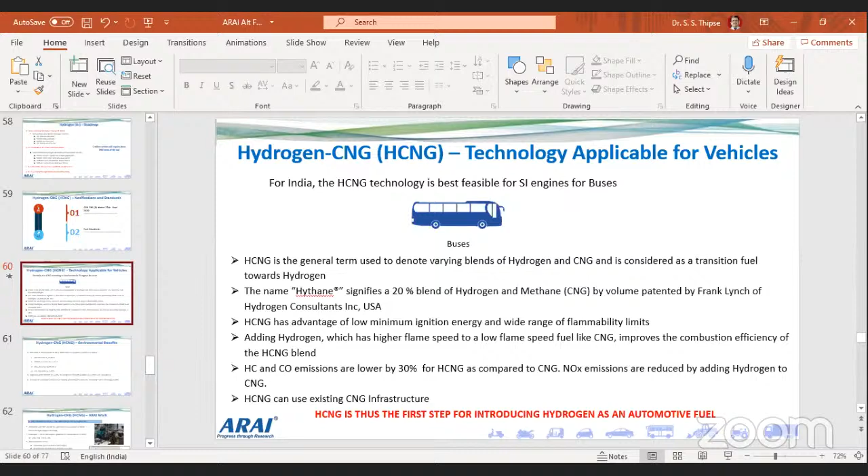So this technology is ideally suited for CNG buses, and that is where the work right now is going on. Environmentally, HCNG is far superior to CNG, and it reduces emissions further, helping bring a cleaner fuel into the market.

At ARAI, we did a lot of work on hydrogen CNG along with Indian Oil, and we ran different engines on hydrogen CNG, and we got very good results.

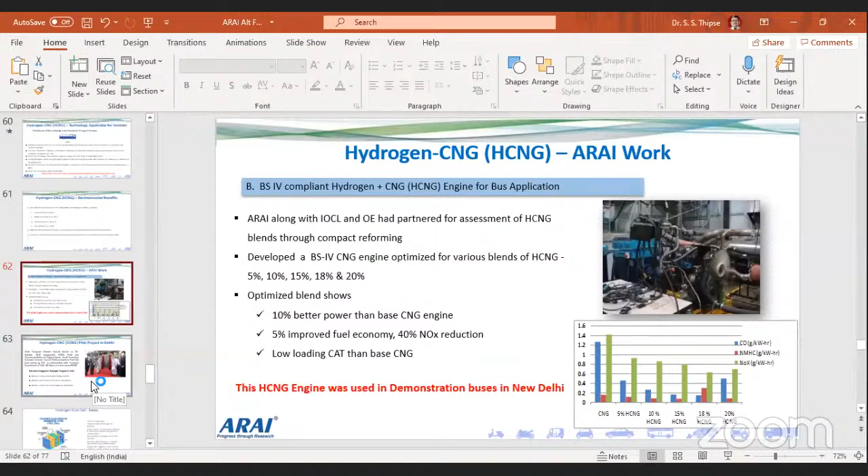Currently in Delhi, there is a pilot project going on where the DTC buses are being converted. In one depot of DTC, the CNG buses are now running on hydrogen CNG, and that particular station was only inaugurated last year, and the pilot project is going on. Once this is successful, they will go for full-fledged conversion of all the CNG stations to hydrogen CNG in Delhi.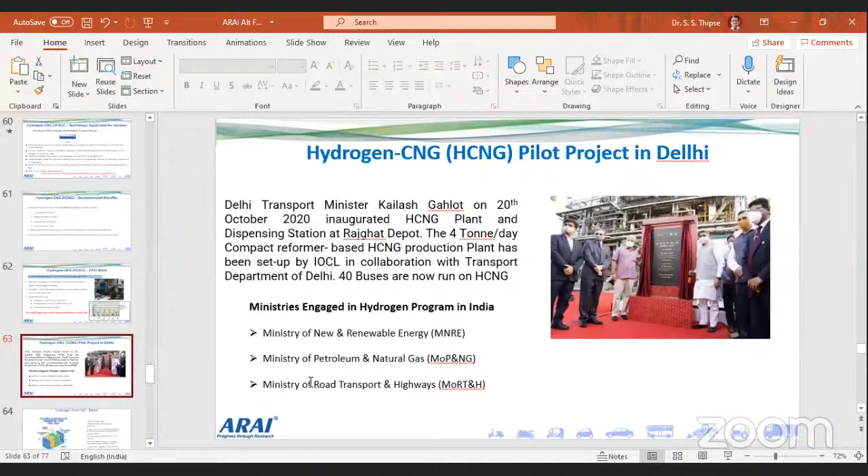So this is the update. Then coming to the fuel cell - what is a fuel cell? A fuel cell is nothing but like a battery, but it is a gas battery, one can say.

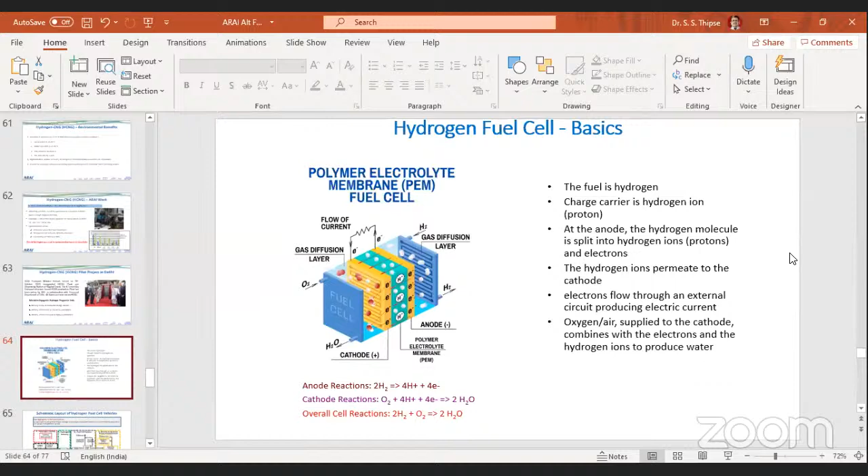So the fuel cell produces current, water, and heat - these are the three outputs of the fuel cell. You take in hydrogen, take oxygen from the air, and then produce water, electricity, and heat. Electric vehicles can also use fuel cells because these are just like batteries, but you need to have a hydrogen fuel system on board - that is the only constraint.

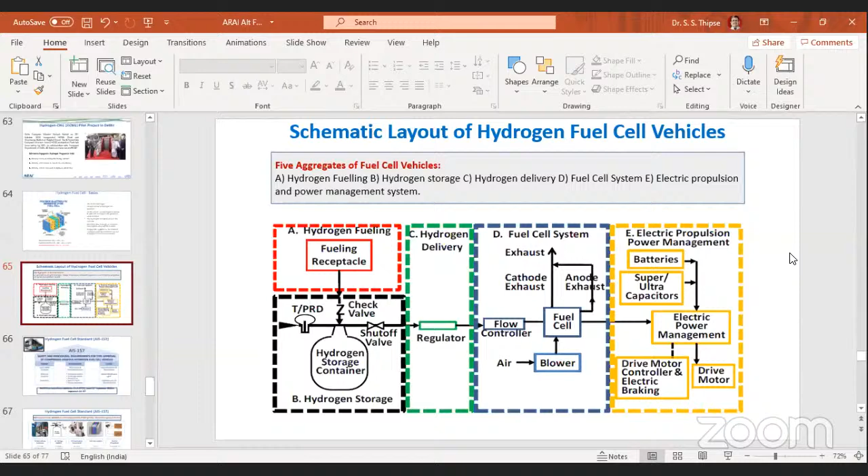So this is a typical fuel cell bus system wherein you have different subsets - one is the hydrogen station, then the storage container, the regulator, the delivery system, the fuel cell stack, and then the remaining part is just like an electric vehicle where you have a motor, batteries, and all those things. So this is how a typical system will be.

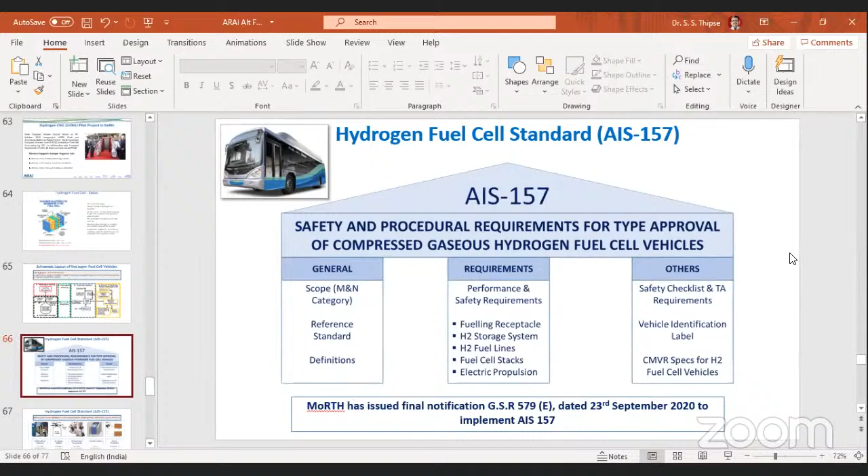Now, the government has introduced a safety standard, AIS 157, for approving hydrogen and fuel cell vehicles. This safety standard is already available and you can see it on the ARAI website - the government has already notified this particular standard. The contents of this standard cover all the safety aspects of fuel cell vehicles, including the receptacle, nozzle, storage system, components, the stack, and the electrical vehicle. So all these standards, rules and regulations are available for fuel cell vehicles.

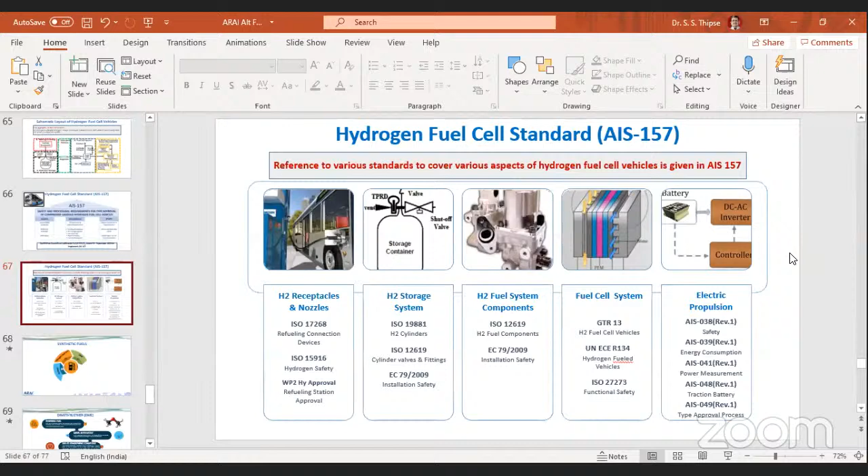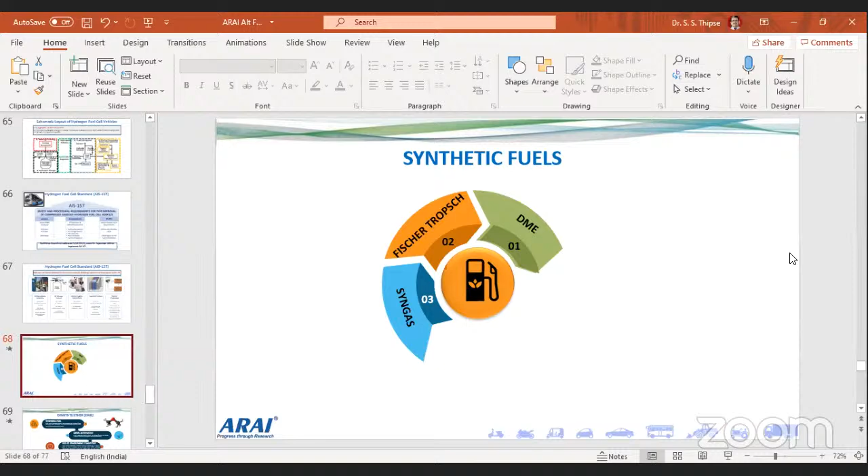So these vehicles are also now going to be developed in a big way, and more vehicles will be introduced in the future. Now coming to another technology of the future, the last bucket of alternate fuels is synthetic fuel. Here there are different technologies - DME, Fischer-Tropsch, syngas - but I will only talk about DME because that is the notified fuel; the remaining ones are still in the infant stages. DME, or dimethyl ether, is a synthetic fuel.

It is an alternative to diesel because it's having very good cetane number, and it is gas at atmospheric condition, but it becomes a liquid when pressurized. It has very low emission content, and it definitely requires very little after-treatment, doesn't require a particulate filter, because PM, NOx, smoke, all emissions come down when you use DME. This is a very good, clean fuel.

Government is actively promoting DME, and hence DME is now notified for automotive fuel. This came only last year, so it's a very recent phenomenon. There are standards and rules for DME in India. The international standard is ISO 16861, which India has adopted. Different rules as far as certification are also provided for DME vehicles.

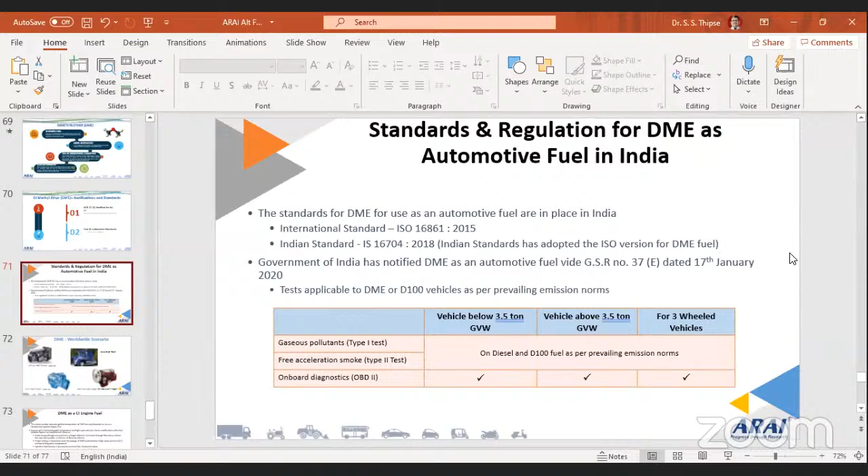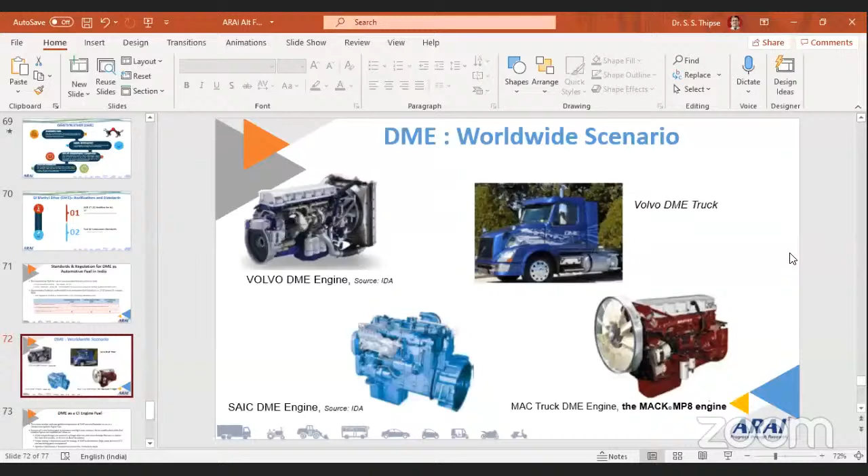DME is also popular in Western countries. Countries like Sweden, Japan, and Germany. There are some Volvo engines, Scania engines, or Chinese SAIC engines which are running on DME, and many such vehicles and applications are already available worldwide. In India too, we are working on how we can generate DME engines in the future.

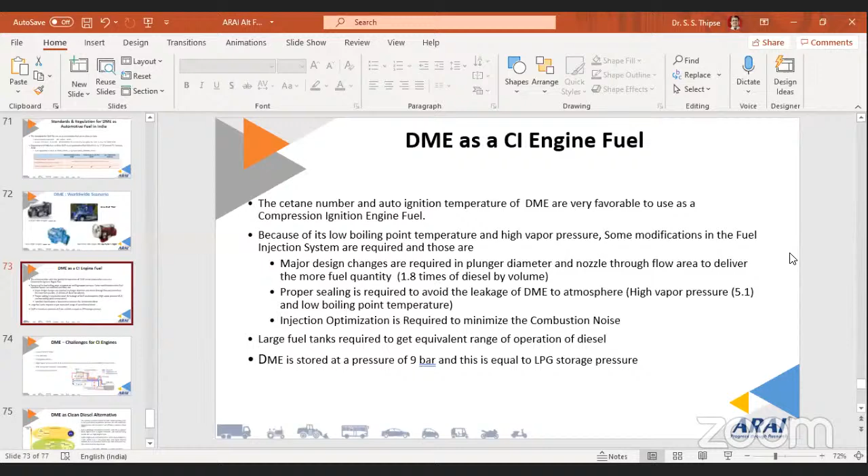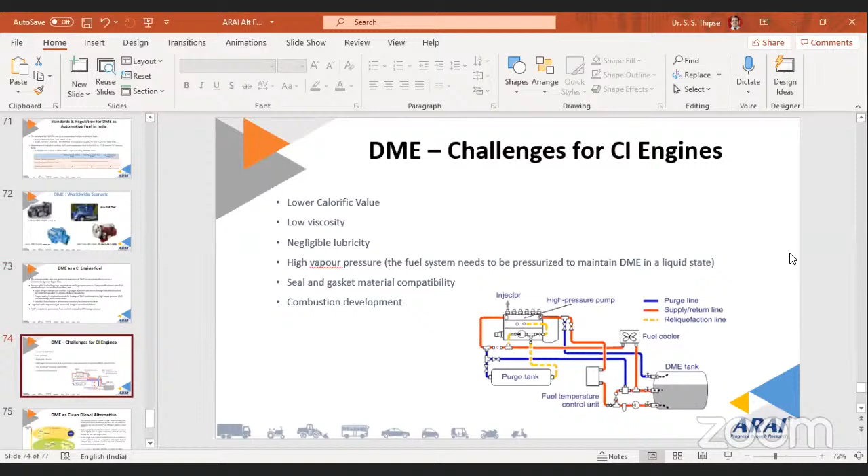The challenge for DME is that you require larger tanks, design modifications, and many such things. It's not so simple to use directly as a CI engine fuel. Many challenges are there. In terms of supply lines, you have to use pressurized supply lines, high vapor pressure is there, gasket and material compatibility issues are there, combustion development issues are there. So there are some issues with DME, and these have to be overcome as we go along.

As far as emission is concerned, people did a lot of work on this, and they found that emissions are very less. DME is very easily meeting all kinds of requirements, and it is very, very clean as compared to diesel. This is some data from Isuzu and Volvo, and they say that DME is one of the cleanest fuels known to them. It is widely used for diesel engines and many applications, and definitely an engine fitted with EGR has very equivalent characteristics to CNG, and hence it is very much recommended.

Another application of DME is that you can blend it with LPG, and you can also use it as a cooking fuel. Since there is an LPG shortage, people are also exploring whether we can use DME as a cooking fuel, blend it, and use it for different applications.

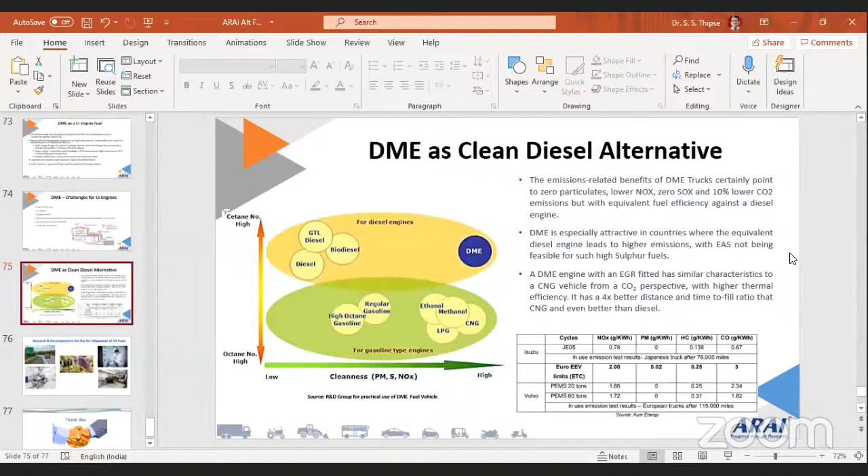So why are we worried about diesel and petrol costs? Because the major transportation depends on that. When the cost of crude oil increases, the cost of diesel and petrol increases, and then the entire market chain is affected because all the inflation and price rise is linked to fuels. Hence every common person gets affected, because his budget goes for a toss, as he has to spend much more money buying fuel.